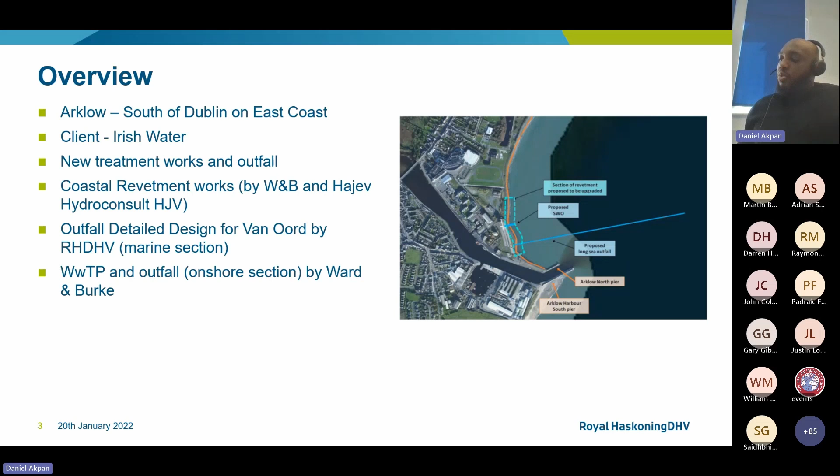So on this slide, you can see the location plan where you have the long sea outfall pipeline in blue, and there's also an indication for where the proposed treatment works was going to be. So for this project, the concept design of the long sea outfall was conducted by a previous designer. Royal Haskoning only got involved at the tender design stage where we produced the tender design and subsequently the detailed design for the long sea outfall.

The basis of design took into consideration the site conditions and available environmental data for the site location, as well as the specific long sea outfall requirements, which were specified by the client. We used those requirements to develop and finalize the route of the long sea outfall, the hydraulic design, which included diffuser configuration, and then we did the pipeline on-bottom stability, scour, and rock armor protection design as well. So on this slide, there is also a snapshot of the main design parameters that we considered during the design of the long sea outfall.

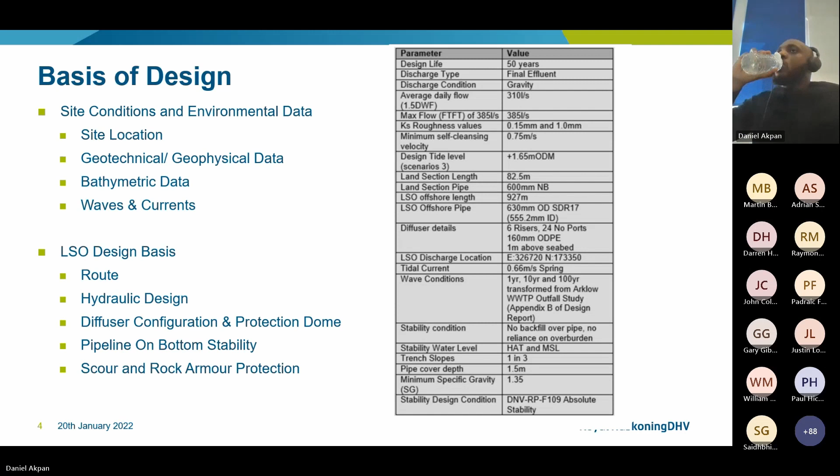So for the detailed design, RHDHV scope of work included the review of new information, as the client had conducted some new surveys to aid the detailed design scope. So for example, we had some new bathy survey, which we used to conduct a burial depth and scour assessment. We also conducted the wave modeling for the pipe and revetment works, the hydraulic design update, stability design, and we looked at the details for the landfall and revetment crossing. We also carried out a Cat 3 check of the revetment design that was done by Ward and Burke.

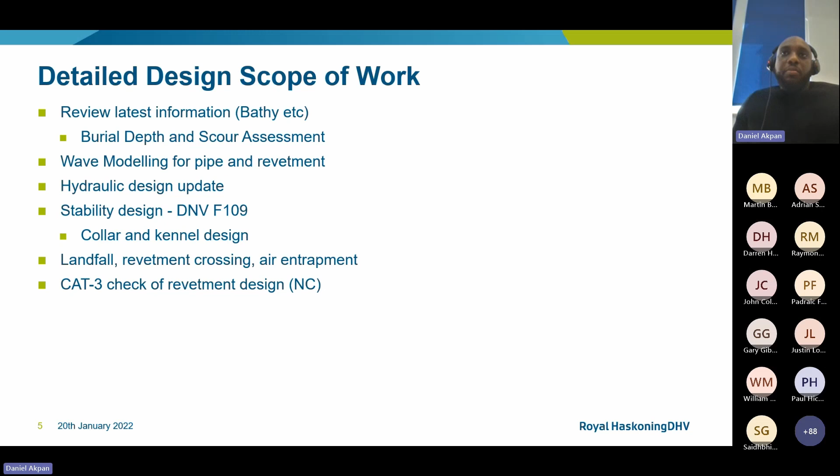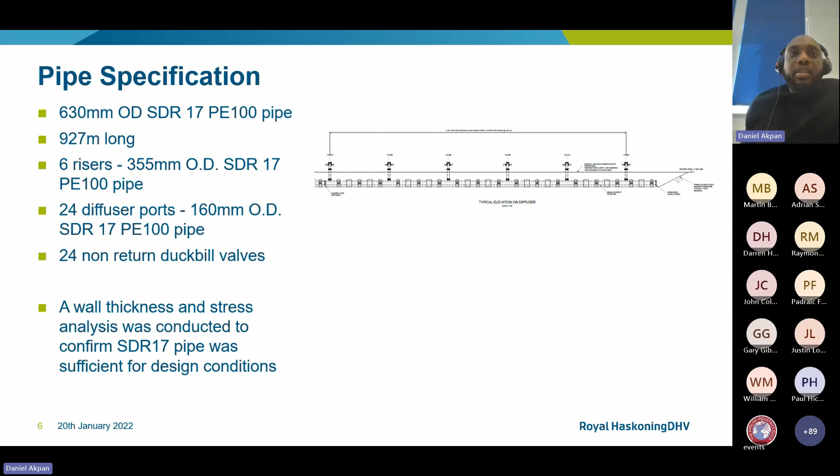So the long sea outfall pipeline was a 630 OD SDR17 polyethylene pipe. It was approximately 927 meters long, and the diffuser configuration, which you can see in the figure on the slide, consisted of 6 risers, each with 4 ports, making a total of 24 diffuser ports. And each port was fitted with a non-return duckbill valve at the end of it. Haskoning also conducted some pipe structural calculations to verify that the SDR17 pipe was sufficient for the design conditions.

So this slide shows the route of the new long sea outfall. As previously stated, the long sea outfall was approximately 927 meters long. We had a St. Patrick's cross that was used to indicate the start of the outfall. And this was then routed underneath the revetment in a trench all the way to the discharge location, which was indicated with a marker buoy. During the routing of the pipeline, we identified an existing pipeline and subsea cable within close proximity to the LSO works. The existing pipeline is shown in orange to the north, and the subsea power cable is on the opposite end in pink.

For the subsea power cable, we were already compliant with the applicable exclusion zones and separation distances, so nothing further needed to be done. But you might notice that the existing pipeline actually protruded into the red line boundary for the works. Luckily, we were able to confirm that that pipe had been redundant for many years, and so we didn't have to reroute the LSO as a result of that pipeline.

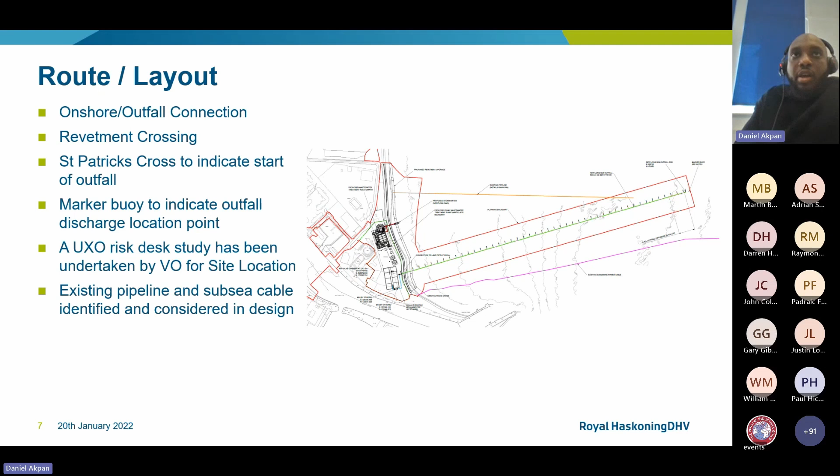A UXO risk desk study was also undertaken by VO for the site location, especially along the route of the LSO.

So as previously mentioned, we conducted some pipe structural calculations for the entire length of the outfall. But this was especially critical for the revetment crossing location, just to ensure that the pipe wall thickness was sufficient to withstand the load that was coming from the revetment. The calculation results did indicate that this SDR17 pipe was sufficient, and we also allowed a 0.7m minimum pipe clearance from the toe of the revetment, as you can see in this slide.

So typically at the onshore-offshore interface, and due to tidal fluctuations, there's usually a chance of air being drawn forward into the offshore sections of the pipe. This can affect the hydraulics of the pipe, so we limited the slope of the pipe underneath the revetment, which is based on air entrapment calculations that we had conducted, just to reduce the risk of air being drawn forward into the offshore sections. If you look on the figure on the screen, you will notice that there's also an air valve chamber just before the revetment, which we also included to get rid of any unwanted air in the system.

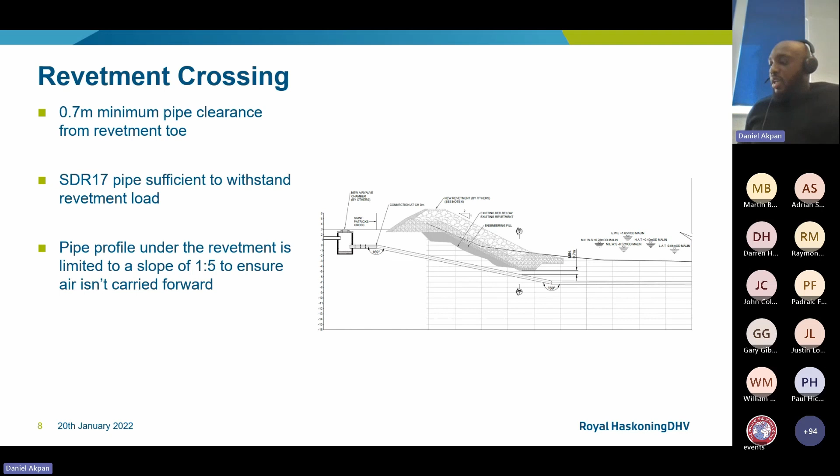So the hydraulic design was undertaken to confirm that the pipe size was sufficient for the design flows. The pipe was designed to discharge by gravity at all stages of the tide, including the extreme water level, which was the worst case. The pipeline was also designed to achieve self-cleansing velocities of 0.6 meters per second for minimum and maximum flows.

And just due to the diffuser configuration, which had 6 risers and 24 ports, we had to make sure that the flow distribution was as balanced as possible across the entire diffuser configuration. We also had non-return duckbill valves on each port, and that was just to prevent backflow into the pipe and to aid dispersion.

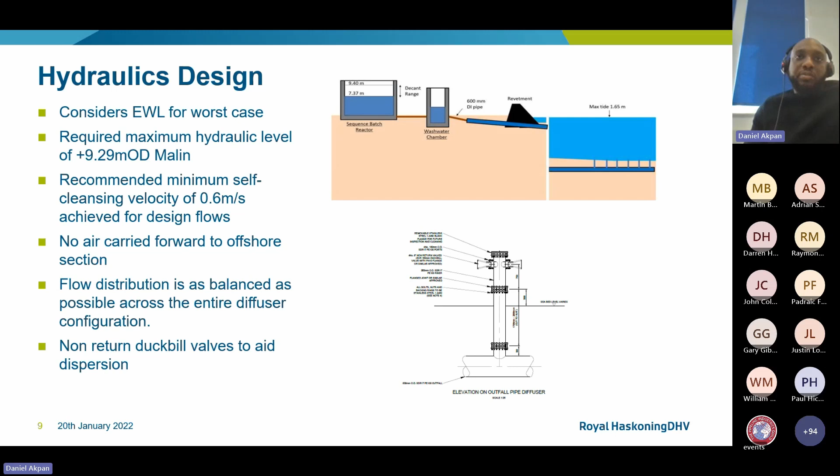The float and flood method is where we put just enough collars on the pipe to allow the pipe to float when it's empty and then sink when it's pumped full of water. Then after the pipe is sunk onto the seabed, we then add additional concrete kennels in between those collars, depending on absolute stability requirements.

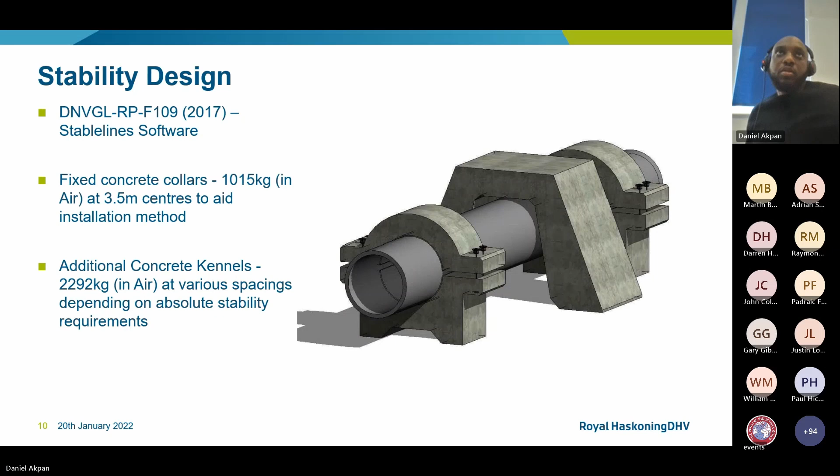So as mentioned earlier, as part of the scope, we also conducted a burial depth and scour assessment. The reason for this was to determine the risk of seabed erosion and to ensure that the pipeline would remain buried and protected from third-party damage throughout its design life. To achieve this, we reviewed the coastal erosion data for the site location, and we were able to demonstrate that the erosion levels were typical and not excessive, and therefore the 1.5 meter cover that we proposed for the pipe was sufficient to keep the pipe buried and protected without the need for additional scour protection.

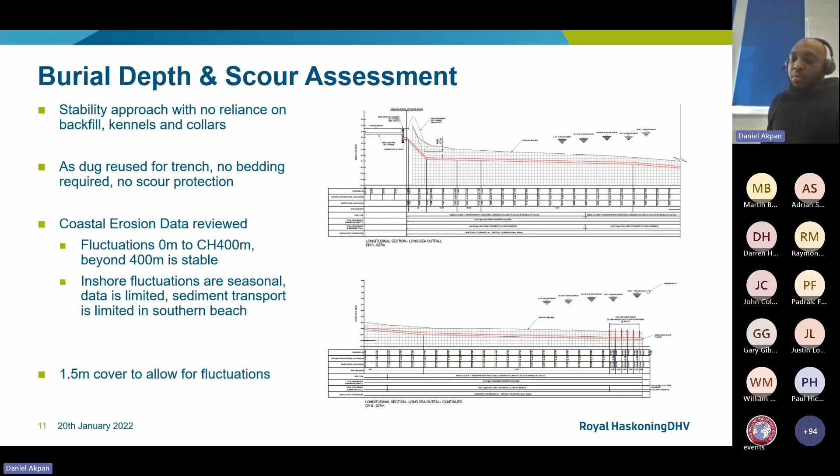We also looked at the historical vessel traffic for the site location, and based on the largest vessel that we identified over a 10-year period, we were able to demonstrate to the client that there was no risk of anchor damage to the pipe from any of the vessels in that location.

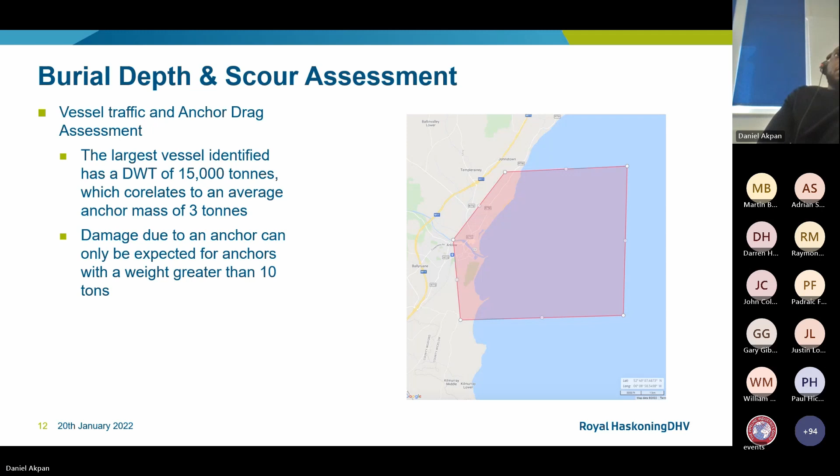Around the diffuser area, it was necessary to provide some scour protection. This is just due to the discharge and flows from the ports, because they can cause scour. And as you can see from these figures, we provided some rock armor. We had 2 layers. We had the rock armor layer, and then we had a filter layer at the bottom of that. And that extended over a distance of 68 meters at the discharge location.

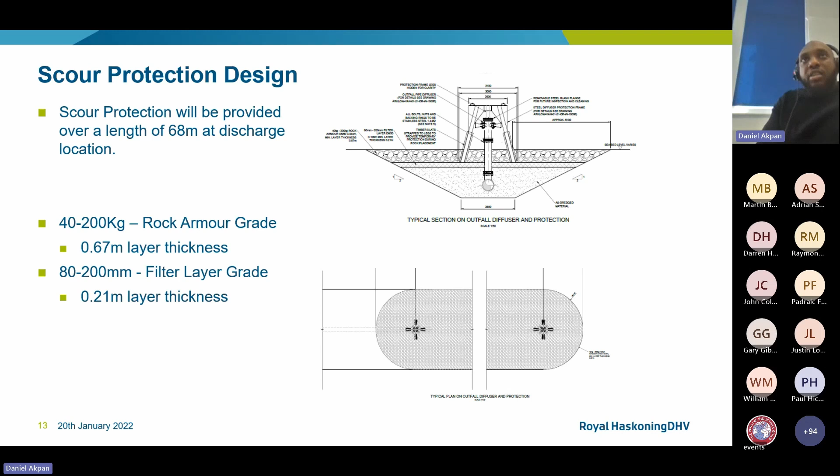Also, because the risers protruded above the seabed level, we needed to protect them from anchors or dropped objects or any sort of objects that may collide with the heads. So we utilized these steel protection frames, which were embedded within the scour rock for stability. Each of these steel protection frames weighs about 2 tons, and those were used to protect the risers from any sort of damage.

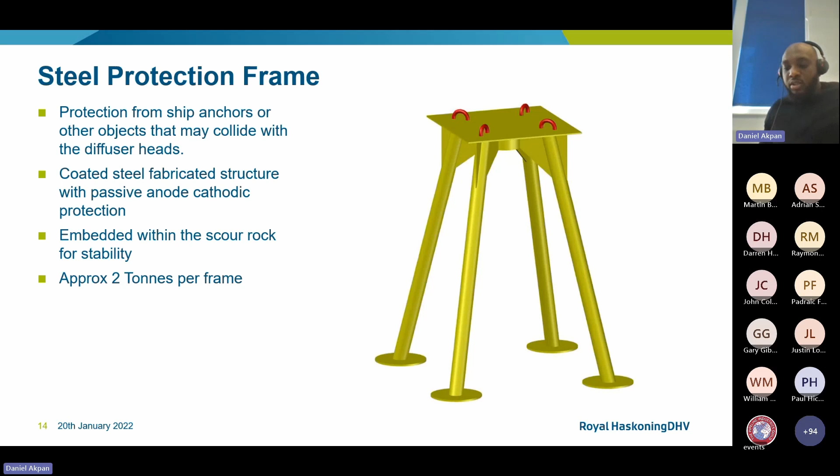So that comes to the end of my section. I'll let Casper take over and talk about the construction methodology.

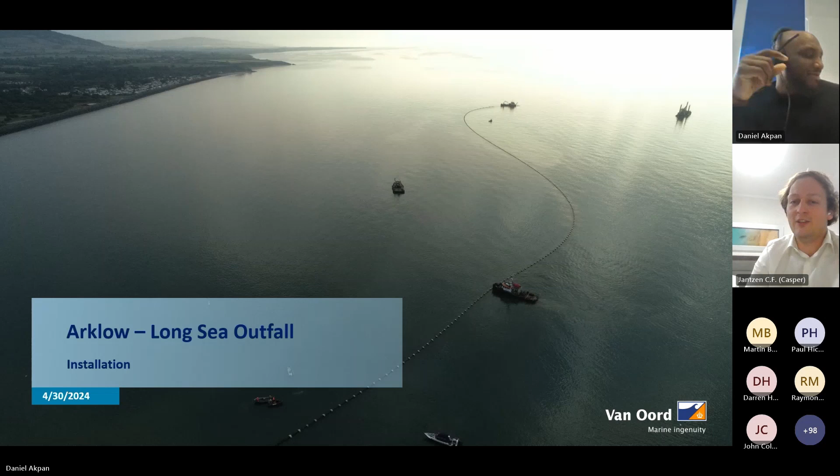Thank you, Daniel. As mentioned, I'm Casper Jantzen and I work for Van Oord as subsea engineer. And for this project, I was mainly involved as installation and project engineer. At the moment, I'm located for another installation project in Australia. So Daniel will be sharing the presentation for me. I think we can start with the first slide of the installation works.

For Van Oord, the project mainly consisted of 3 phases: the trenching works, pipe preparation, and pipe installation. On this picture, you can actually see the pipes being prepared and brought into position for connection. That is a later stage. So we start with the beginning, which is, I think, an overview on the next page. Can you go to the next page, please?

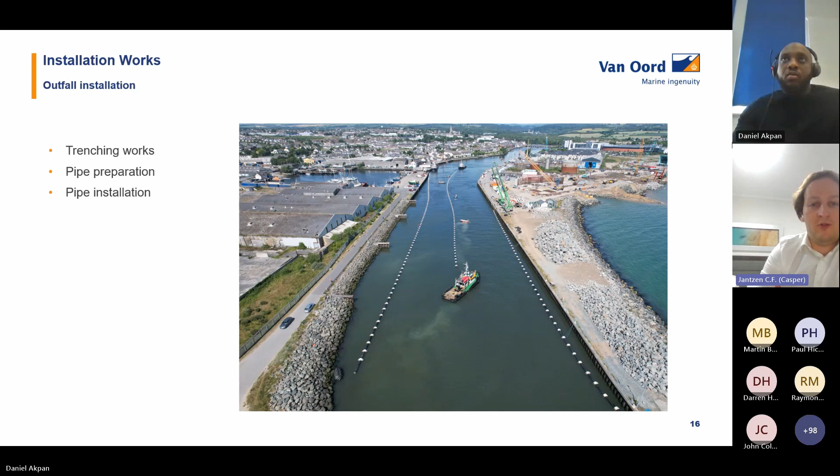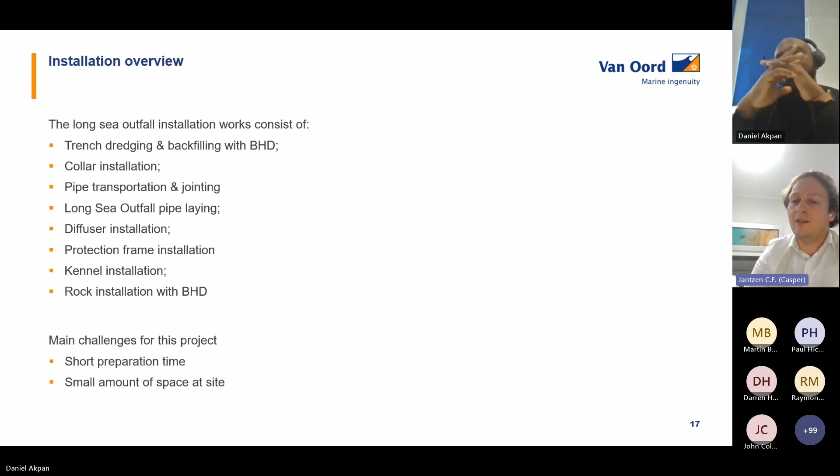We had the outfall consisting of trench dredging and backfilling with the backhoe dredger, collar installation, pipe transportation and jointing, the pipe laying itself. After that, the diffuser installation, a protection frame installation, and then the kennel, and finally rock installation. Our main challenges in this project were quite short preparation time and a small amount of space on site, which can actually be seen on the next slide, where we have an overview of the full site.

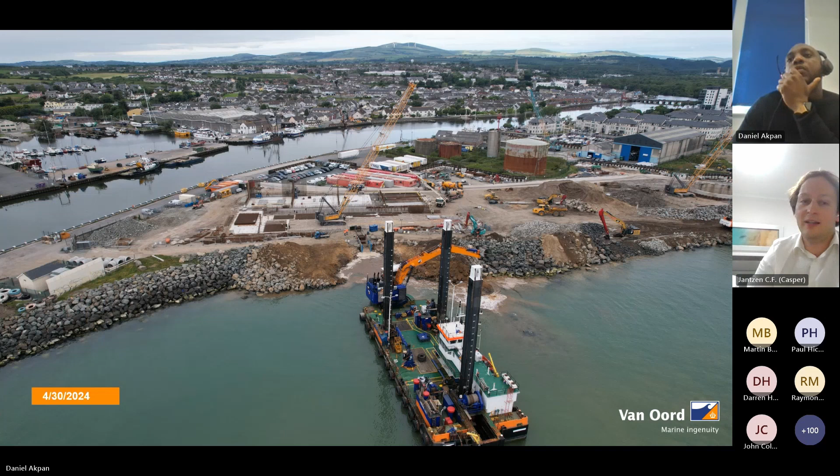At first, we started with the trenching works. In the next slides, you can see the overview of the trench that we made. So you can see here that the deeper blue part is actually the trench, and on the north side we dumped all the material temporarily so that it could later be used for backfilling.

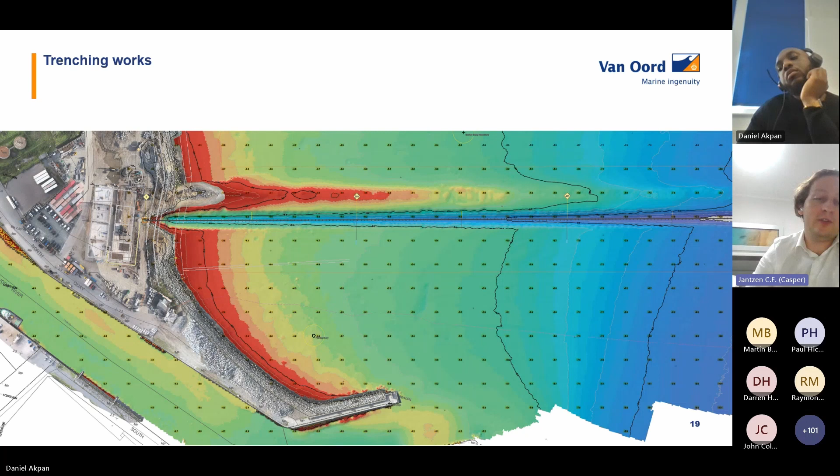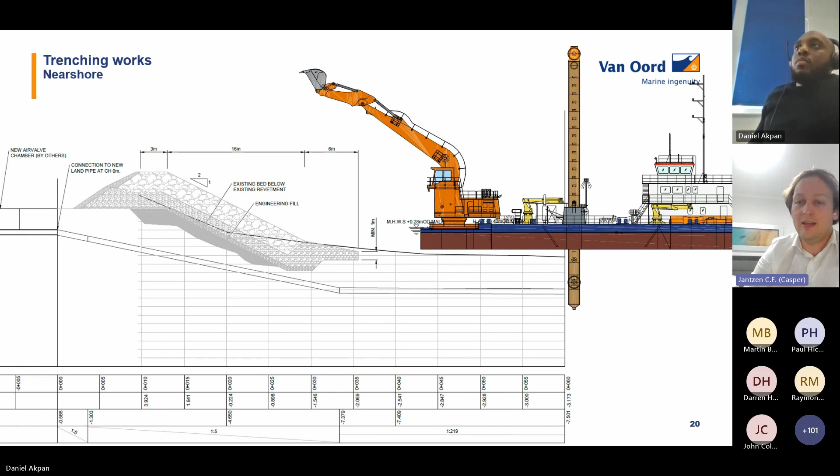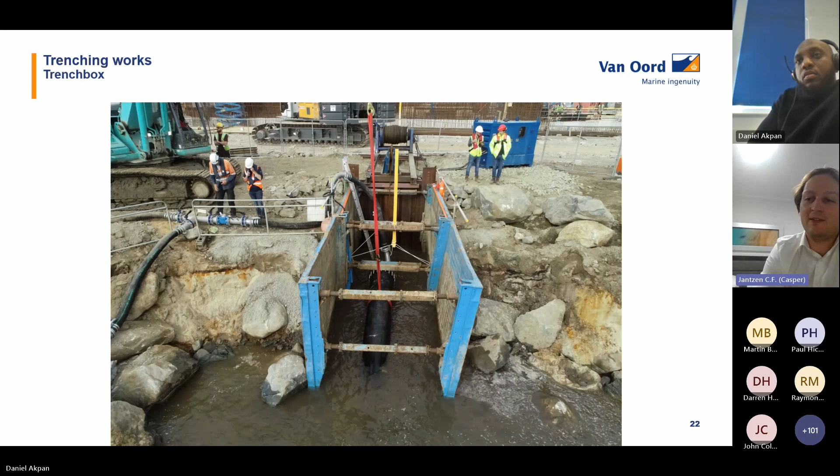And if we go on, we can see another picture, but taken from the offshore side. So here you see that just after that winch that you see onshore, there's a crane working, which is installing the foundation for the building already. So again, we had to design this in quite a small area, but it all worked out, and yeah, it's quite nice. So after the trenching, or actually during the trenching, the pipe arrived, of which you have a picture in the next slide.

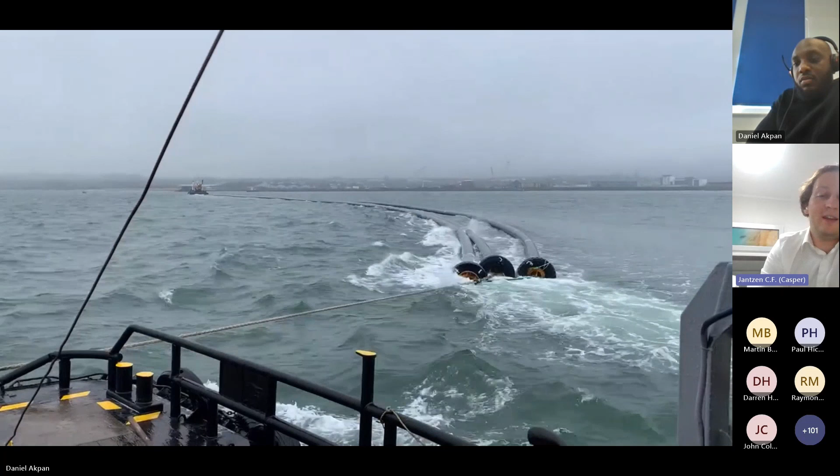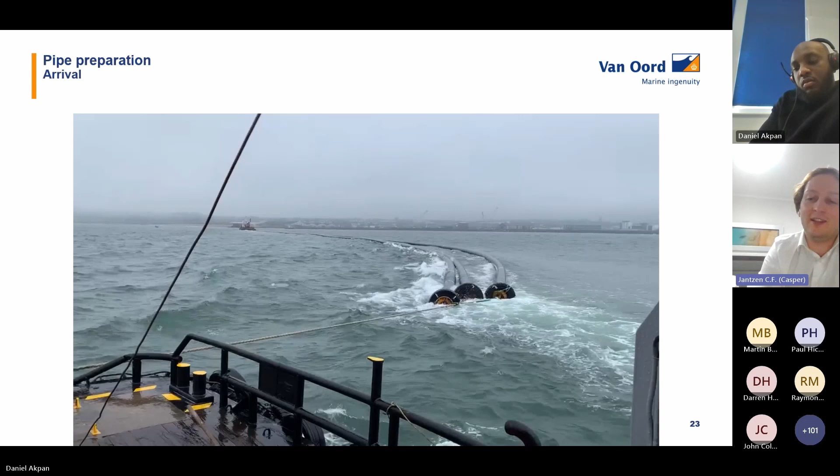And as you can see here, that's actually a short video, the pipes are brought in long lengths. The pipes themselves are approximately 300 meters in length, and they were towed all the way from Norway to Ireland. And even though we have only small waves here, towing these long pipes into a small port was quite difficult. But in the end we managed, and I think we have a nice picture of that in the next slide, the top view, where you can see that one tug is towing the pipes inside, while the other tug is guiding it to avoid touching any of the quay walls, because we had to cross a small corner.

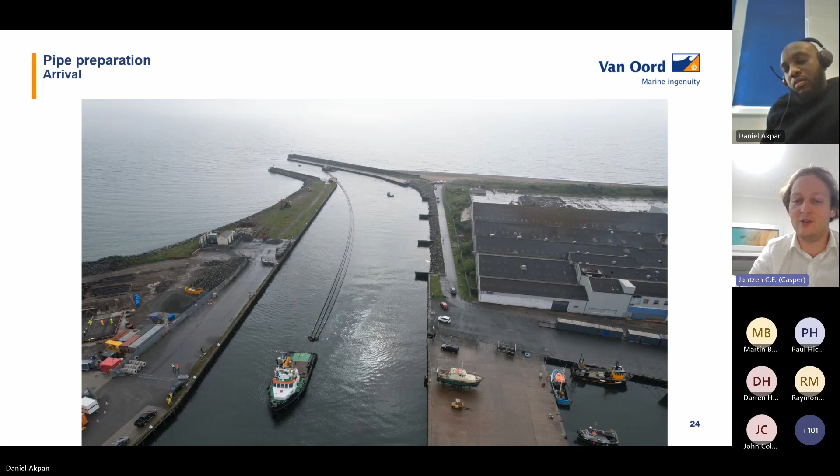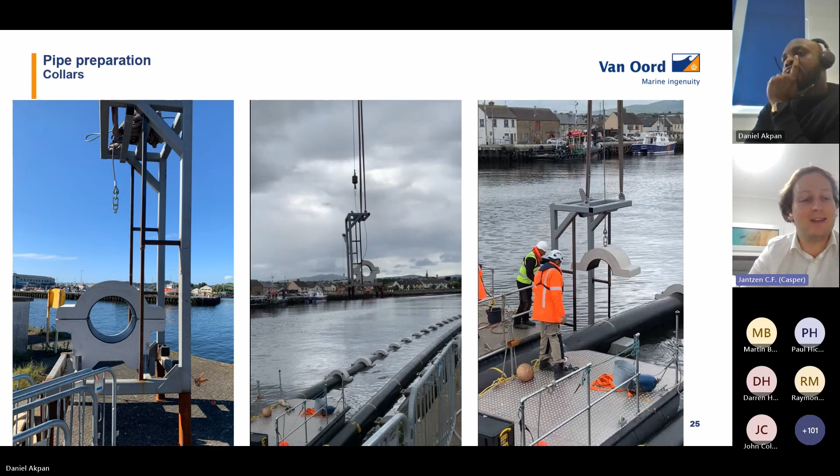Here you see that we lower it down, then we connect some bolts and nuts, and afterwards we can just let the pipe drop into the water again and remove the frame. And then for every 3.5 meters, we install the collar to add sufficient weight coating.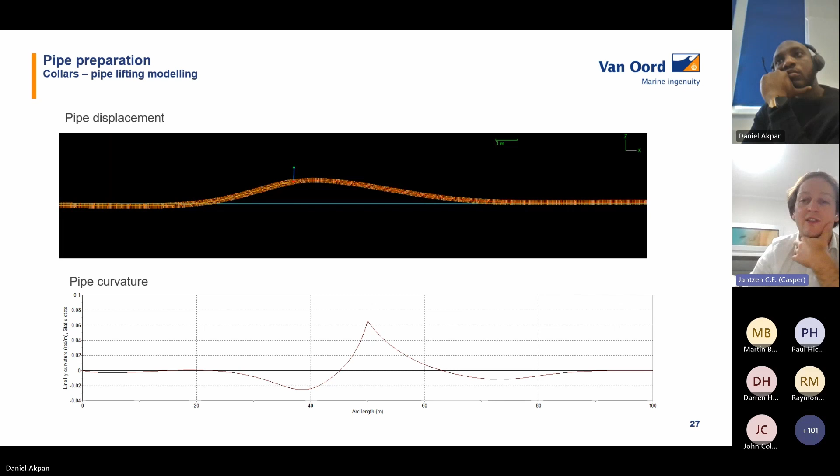We check before we do any lifting operation, we check the bending of the actual pipe, and you can see the exact curvature of the pipe itself. Of course, it has to stay within certain limits, and that also has to do with the next part of our installation, which is the welding of the risers.

So here we can see one of the risers. As Daniel already mentioned, we had a couple of risers on this project, and they needed to be installed on site, which means that you have to make some holes in your pipe, which is obviously not very ideal for the strength.

So what we did, we butt welded these risers onto the pipe, and then we had to lower it into the water again, which you can see in the next slide.

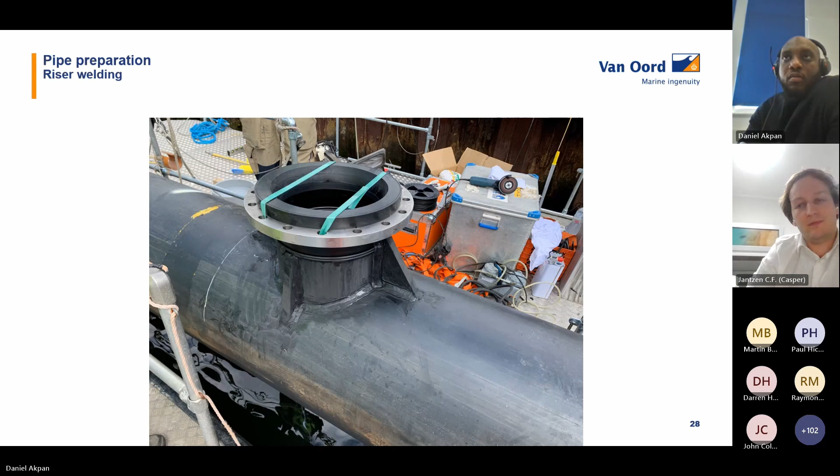I think what's interesting to note here is that you can see that we use a spreader beam for the lifting. So contrary to when we were installing the collars, where you just have one lifting point, here we specifically choose to have 2 lifting points in order to keep the pipe straight in the middle and minimize the bending as much as possible, since we create this weak point.

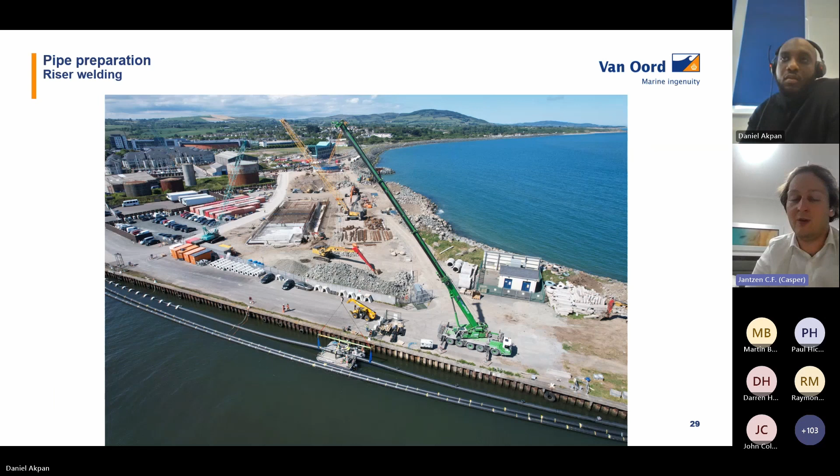And then again, we do a quick calculation for this, what can be seen in the next slide. And if you compare this to the one where we did the collar installation, then you can see that it's a much larger bending radius. And on top of that, we then also install some bend restrictors, so that this weak point in the pipe will not be damaged during any sinking operations.

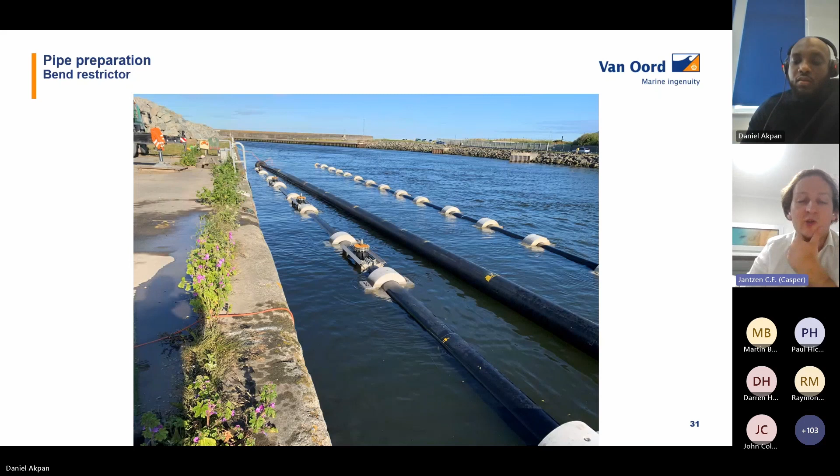So then the next part brings us to connecting all the pipes together before we can sink the pipe, which can be seen in this picture. Again, a pretty small port, but we were able to use the quay wall to lay it next to it, and you see the cranes a bit further down.

If you can, you have to look properly. And there we then make the connection using 2 cranes for the installation. And at a certain point, you have a very long pipe, about 900 meters, which we can see in the next slide.

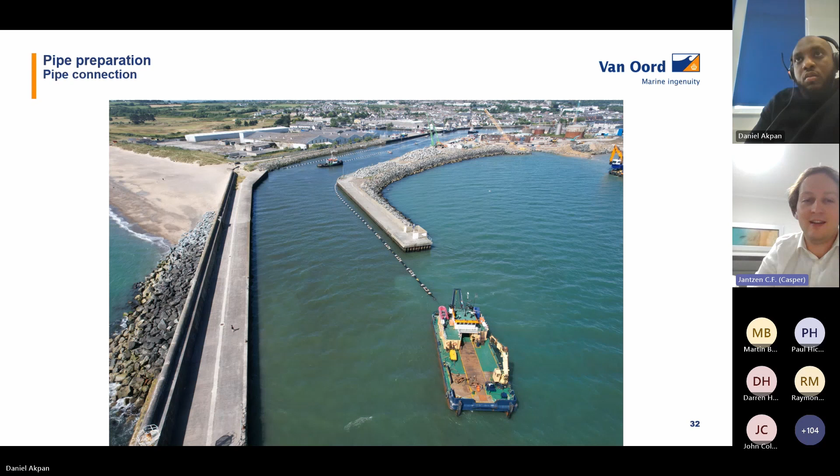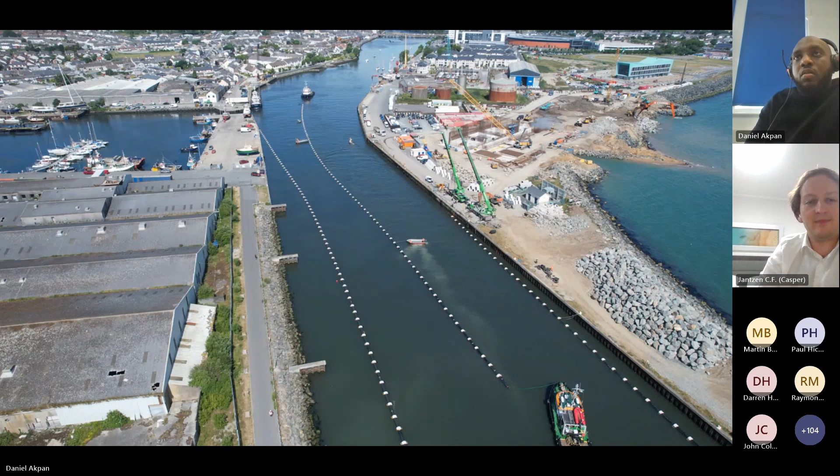Here are 3 sections together. If we go further on, here we can see the full pipe all connected, waiting to be towed into the installation point. And as you can see, this is already a very long pipe, and this is also for us the maximum we would like to install in one go.

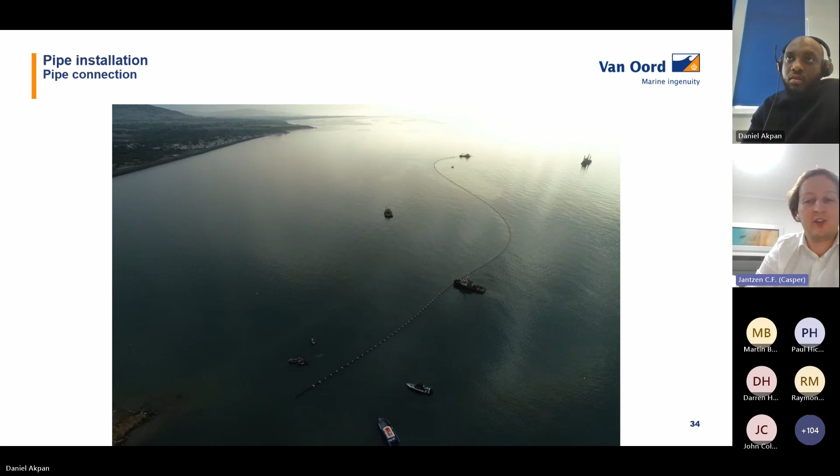And for this we need very nice weather, as less waves as possible, and still it's not too easy, which we can see a couple slides later. So to install this pipe, we will use the float and sink method.

I think most of you probably know the float and sink method, but just to be sure, since it's a plastic pipe, it is floating on the water, so we add concrete weight coating, but we don't add so much concrete weight that it sinks immediately. So that means that once we bring it into position and we fill it with water, the pipe will sink in this sort of S curve that you see here.

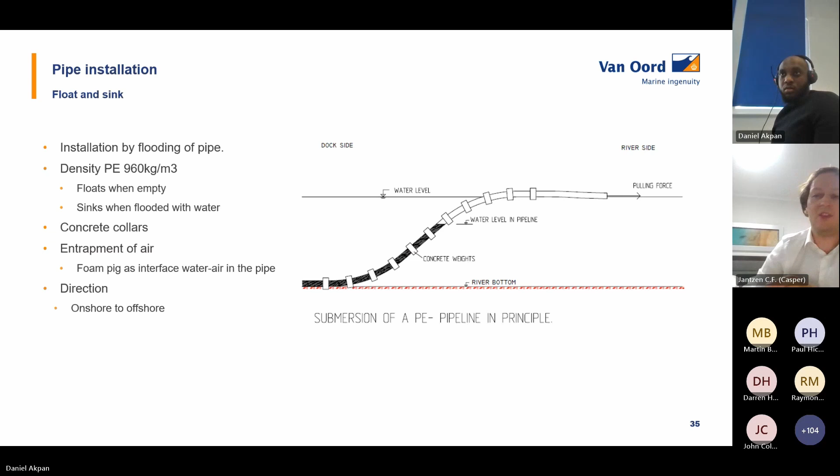In this project, we sink the pipe from onshore to offshore, and we use a foam pig as interface so that you make sure that on the one side you have water and on the other side you have air. So then we have some nice schematics of the pipe installation itself.

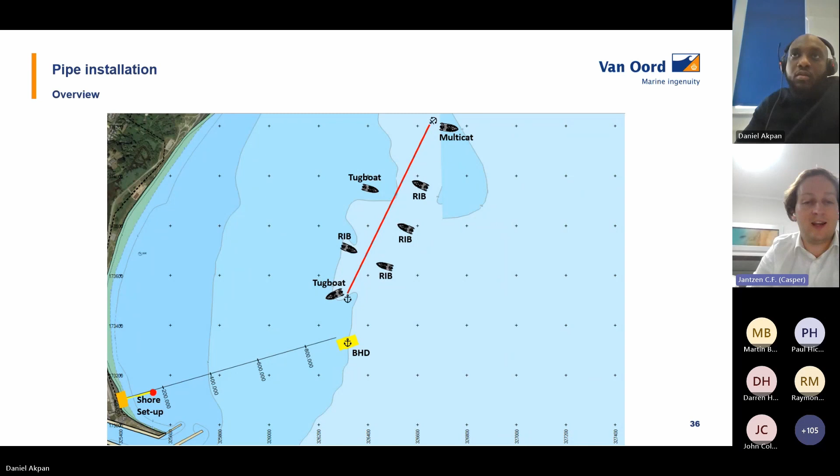So what you see here is that we use one multicat, 2 tugboats, and some smaller additional vessels. The tugboats and the multicat do most of the work. So we see them bring the pipe into the shore setup. Let's go to the next slide and you see it a bit closer, where we maneuver it properly towards the messenger wire.

Because the tugboat is relatively deep, we can of course not bring it all the way in. So we have to connect the pipe to a messenger wire, after which we use the winch to pull in the pipe. If you go a bit further in the slide, you can see it actually connected.

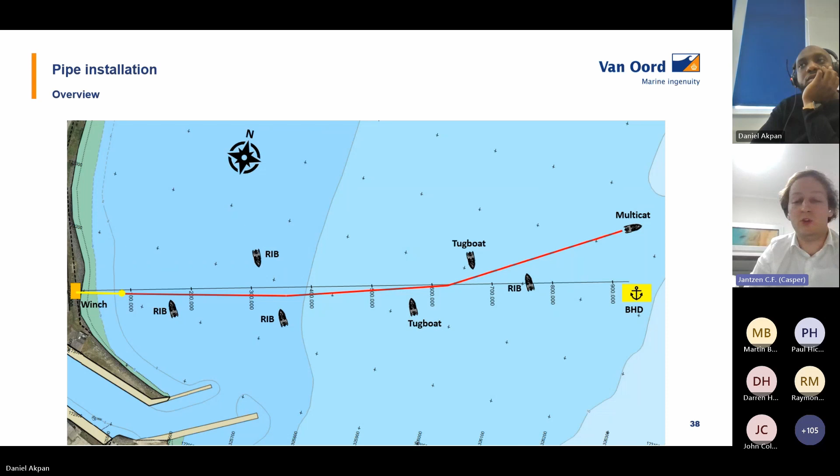Then we can see that the multicat is moving the pipe toward an anchor point, in this case the backhoe dredger. Because of that, we have 2 fixed points, one onshore and one offshore. And then you see the pipe laying straight before we can commence with the sinking operation.

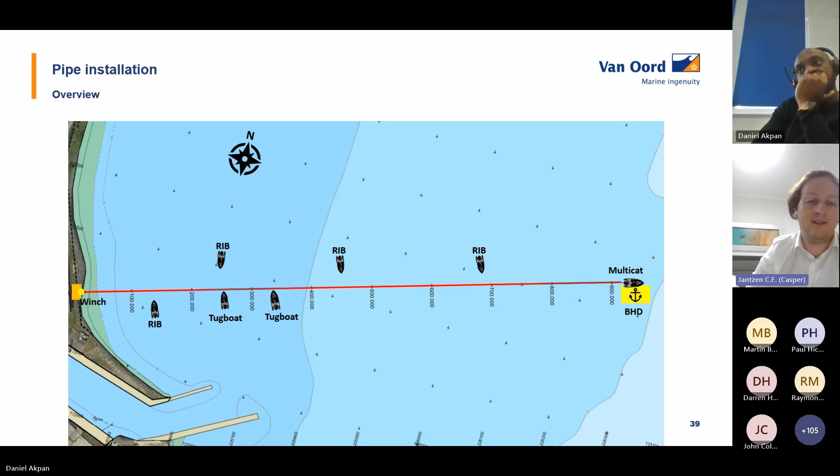So if we then look at the onshore connection point, that can be seen in the next slide. Here we can see that you have some hoses connected, with those we will start pumping in the water. We're actually just using seawater for this, and that means we start sinking it from onshore.

Here we already started, as you can see, because the pipe is already sinking if you look on the bottom of the picture.

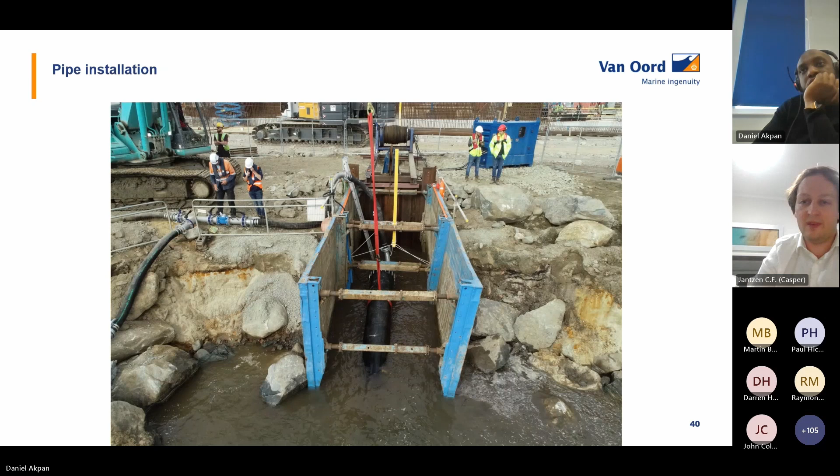If you then go to the offshore end, here you see that the pipe is just floating without any water in it, and that there are hoses connected to the end of the pipe. Those hoses are used to let out the air, but also to blow in additional air if the pipe is slightly out of position.

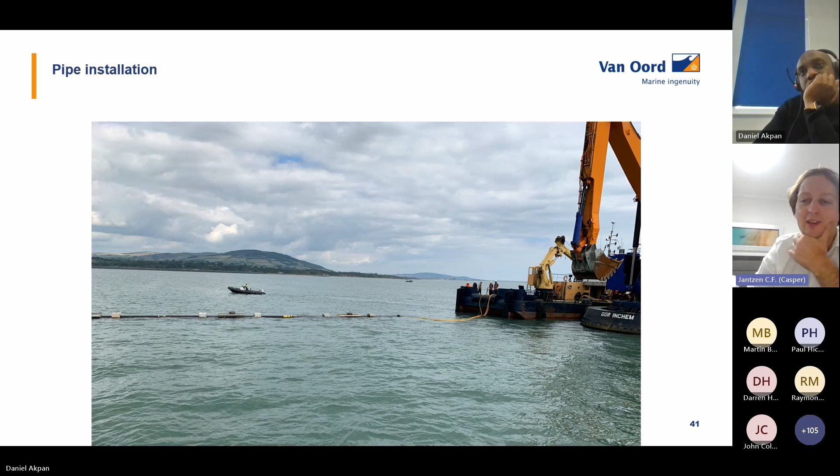In the next slide, you can see how it looks if the pipe is slightly out of position. This was during the sinking operation. We see here that one part of the pipe is already beneath the water surface, and that tugboats are actually keeping the pipe in position.

But as we also see, between the 2 tugboats, the pipe is very straight, while on the bottom side of the picture, the pipe is in a curve. It is not ideal because we need the pipe to be in the trench. This was happening due to quite a high current at that point.

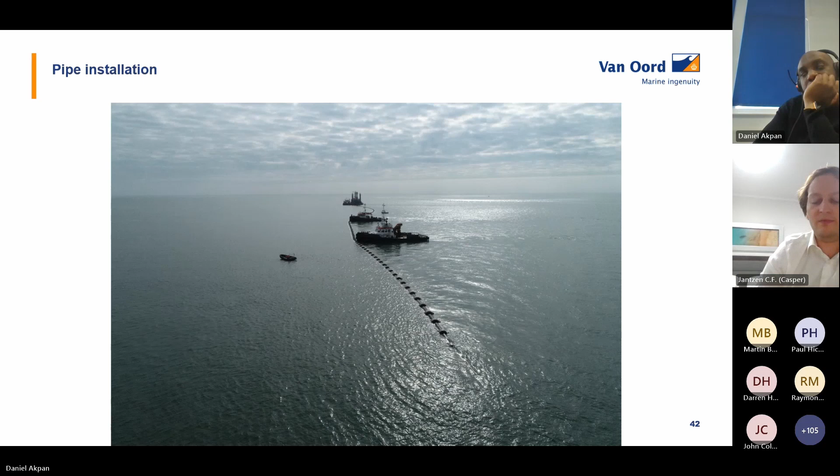So what we did, we paused the operation for approximately 1.5 hours. And because we had this contingency and could blow air again on another side of the pipe, we brought up approximately 20 meters, after which we could continue. This mainly shows that you need to be able to be flexible in these kinds of operations.

Again, I want to show you the installation engineering part of it. Before we start, we actually look at the forces on these 2 tugboats. We want to know if these tugboats are strong enough and if the pipe is strong enough not to bend around these tugboats while performing the sinking operation. There's quite some preparation involved to make sure that nothing goes wrong.

But in the end, everything went quite well, and we were able to install the pipe within approximately 0.5 meter distance from the center line. In the next picture, you can see the final part of this installation.

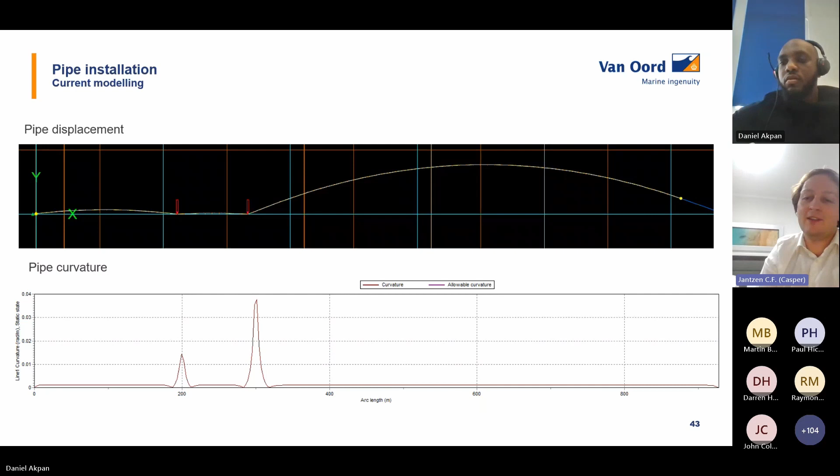After that, we did some additional works underneath the surface for the diffuser installation, for instance, and the frames that were also mentioned earlier. But since it's under the water surface, we don't really have that much nice material of it, and it was kind of repetitive work. So I just want to focus mainly on the installation part.

And then I think if the video works, Daniel, you can shortly show that. It is a nice overview of the installation day, basically, because the full pipe was sunk in 1 day.

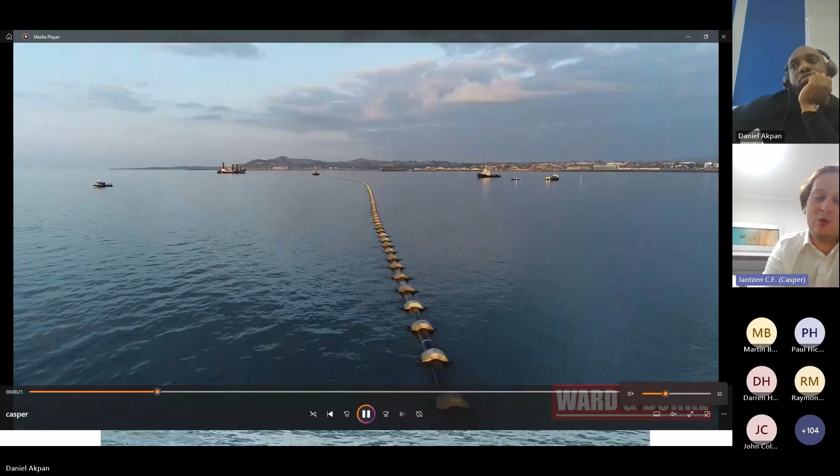So Ward & Burke, our client, made this video, and as you can see, we started quite early in the morning because we wanted to bring in the pipe at high tide. So we started as soon as it was light by connecting all the vessels and moving the pipe from its anchorage position into the trench box.

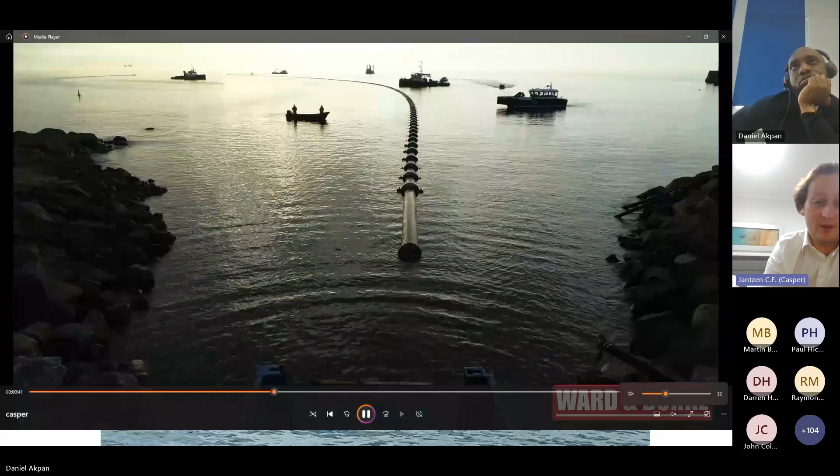So here you can see that the backhoe dredger is waiting to receive the end of the pipe. You can nicely see the site as well, all the cranes still there, people waiting for the pipe arrival. This is the pulling in of the pipe.

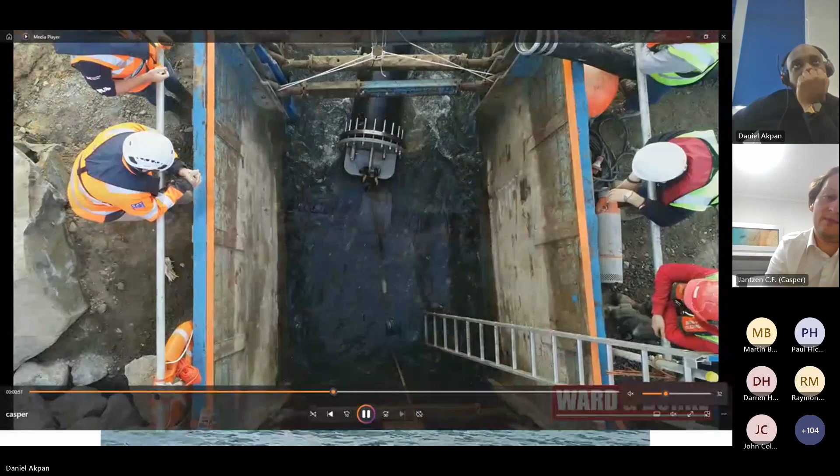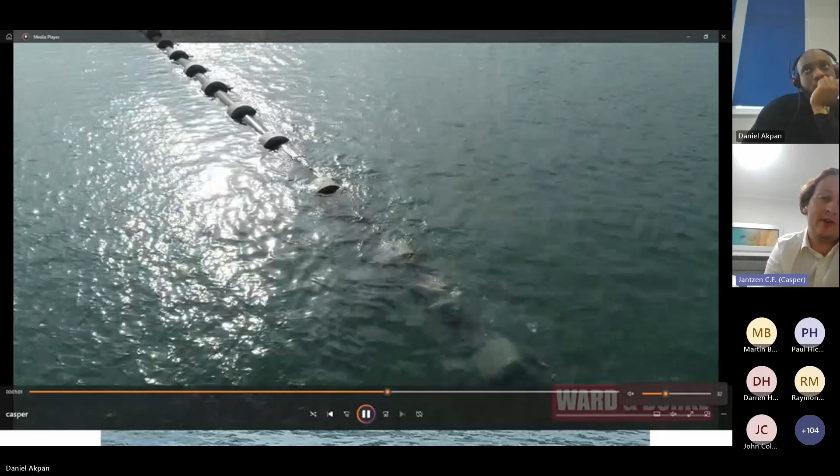This is actually the sinking of the pipe, so you can see that it goes relatively quickly. As long as you have the pipe in a straight line, you can also keep sinking it quickly. So it's mainly, you see in the background, you see the breakwater.

When we were crossing the point of the breakwater, then we encountered current where we had to pay more attention and move the tugboats closer together in order to keep the pipe in a straight line. And here you can see what happens if you don't use tugboats. You have a pretty big curvature, which is of course not really an issue because we're not sinking this part of the pipe.

So this then went on for approximately, I think, half of the day. After we did the commissioning of the pipe the same day, still to be sure that there were no leaks. And after the pipe installation, then of course we went on with all the other smaller works, backfilling, and at the end, scour protection installation.

I think that was mainly what I want to show in the slides of this project. So I hope you enjoyed it. And if you have any questions, please let us know.

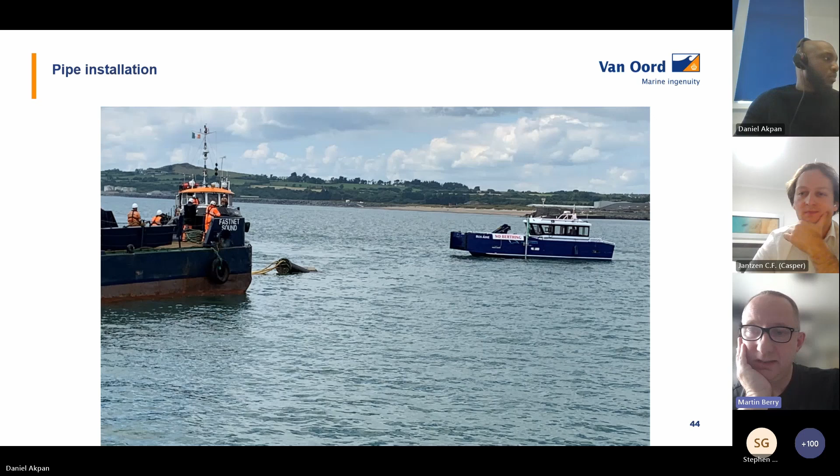Okay, so the next question was again to Casper. Why did you choose to side dump the excavated material to the north of the trench? Was there a risk that the currents would result in it basically going back into the trench? And the second question from Phil is also around how did you ensure the diffuser tees were vertical after installation?

So the first question about the currents, actually we had a cable laying at the south side, so we wanted to keep clear of that because we are of course not allowed to excavate material afterwards. So better to place all the material on one side. And indeed there was a slight risk of the currents moving it back into the trench. But since we had the backhoe dredger available during the whole operation, we could also do maintenance, and basically directly after the trench was finished, install the pipeline. And then of course, if there's only 1 or 2 days, that risk is not too high. And secondly, for the diffusers, indeed, it would be slightly difficult to do that.

But at the end of the pipe, the connection was sort of on the top, so that at least we knew that the pipe when sinking was hanging on this one point. And also the collars are heavier on the bottom. So you assume that it goes straight down, and then afterwards we can check using the survey vessel with the multi-beam if they are indeed straight. And there's a little bit of a tolerance on it as well, so they don't have to be fully straight, but within a couple of degrees.

Okay, next question. What corrosion protection was used for the bolts on the weights? Dan, do you want to answer what type of bolts were proposed and used on the collars? Bolts on the collars, I'm gonna have to... I think Royal HaskoningDHV asked us to use, I think it's called super duplex steel 1.442 or something. So yes, it was quite a nice quality steel, which we used for all the exposed steel parts. So it was a grade 1.4462 from BS EN 10088. And I think that was also part of the client's requirements as well. So the client specifically required that grade of stainless steel.